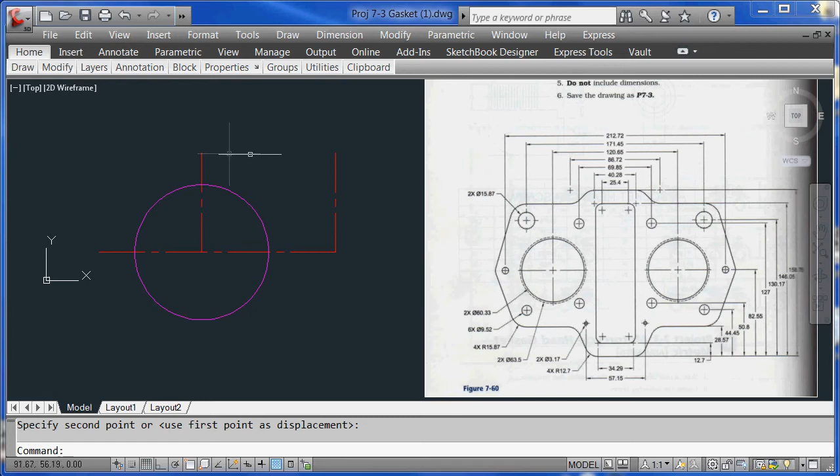Okay. So what I'm going to do initially is kind of start laying out some of these outer lines. I'm only going to do a few, so that way you get to see how I would do this, but also you guys could hopefully pick it up pretty quick and then just continue on your own. So what I did was I went ahead and brought in a scanned image and I popped it in right next to this starter piece that I gave you guys.

Okay. So if you remember correctly, I told you, and I misled you, that this was going to be symmetrical with the bottom. And after looking at it, it's not. Unfortunately, it's not. So we're going to have to construct this whole vertical entirely, but we can mirror it around the center of this. So in essence, the center right here is this little center line right there. Okay? That circle is obviously that circle right there.

But what we need to do is create from bottom to top this whole left-hand side. We could do the right-hand side, but I just started with the left-hand side, so I think I'll start there. So the first thing we need to do is start constructing from the bottom to the top, because that's the way our dimensioning is running. Okay, so note that the baseline is right here and we construct up.

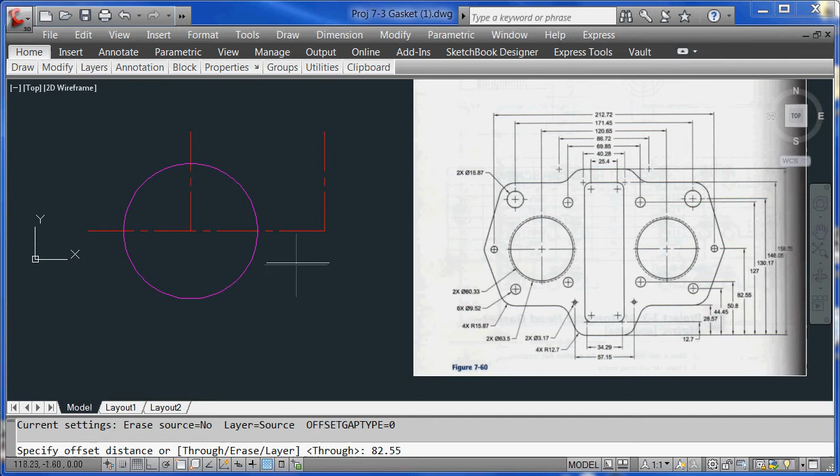So the first thing I want to do is identify what the baseline is. If you note, this dimension here is 82.55 millimeters. So what I want to do is offset that center line 82.55. So I'm going to type O for offset, 82.55, and select that line and place it down there. And notice it's off my screen, way down there. Okay, so it's down further than I thought.

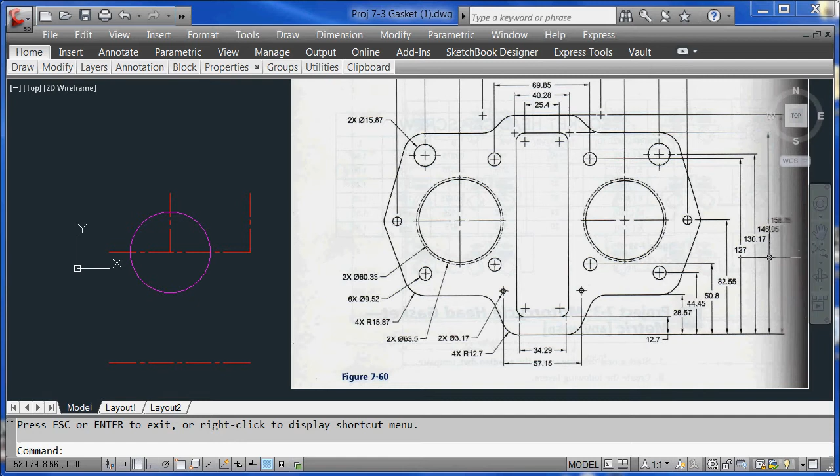So in order to see my sheet here, I'm going to just scale it up a little bit. There we go. Pan it over a little bit. Okay, so now I have my baseline, which is here. So what I want to do is maybe take the next step, which is this line right here. You know what? No, let me do the overall. And the overall, this kind of got smushed by my scan, so I'm looking at the book. It's 158.75 millimeters.

So I'm going to offset 158.75 and hit return. Select that and then place that one up there. Okay, so now I have this line and that line. And now I want this line right here, and that's 28.57. So I'm going to offset 28.57, go there to there. Okay, so now you kind of see what I'm doing here, okay? But I'm working on this side.

So now I need to figure out what's my dimension out here to the edge, because I want to get my max and mins. Before I do that, let me just place this line up in here, and that's 146.05 millimeters. So that's offset 146.05 millimeters, and let me place that there. Okay, so now I have the top, this one, and that one. Let me go ahead and change the layers. I'm going to stop the video here, and I'll come back and I'll have these on their correct layers.

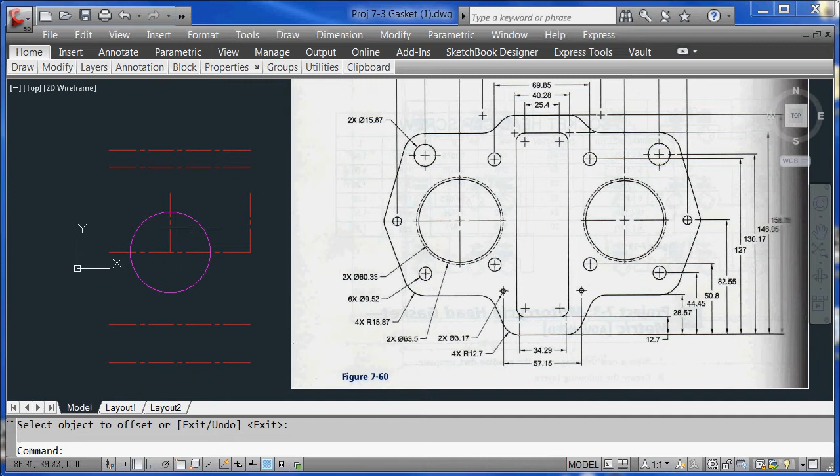Okay, I went ahead and changed these to the object layer, so we're going to go ahead and start. Now I'm looking at this drawing and I'm having a little problem with this right here. Nowhere on the drawing nor in the notes do they give you an indication what the diameter is of this hole, nor the distance from, say, there to there. So this is going to take a little guesswork. Let's make this diameter 7.00 millimeters, okay? Then from here to here, we'll make that 9 millimeters. So let me pan down here a little bit.

So if I want to go from the center here to this radial point, or this center point of this hole, the furthest most hole, I have to take the 212.72 and divide that by 2, which gives me 106.36. Okay, so now I have to offset that center line, 106.36, return, and then offset there. So that's where that center of the hole is going to be.

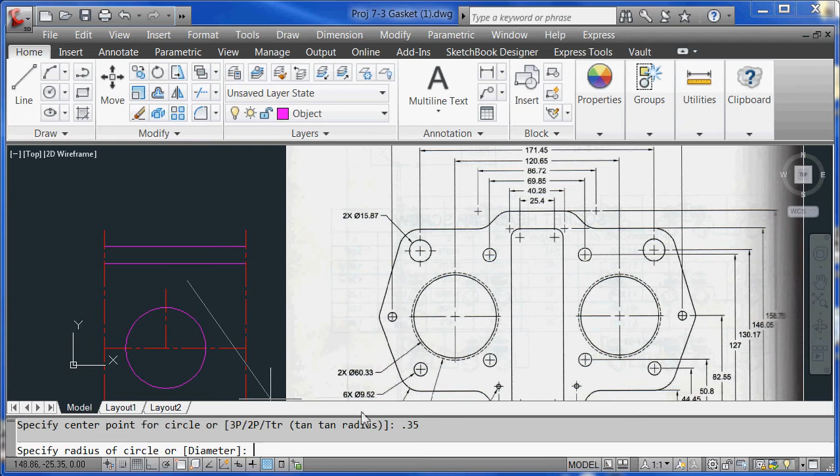Now, let me pan up and let me create that. And remember, I said that that circle, that hole there, was going to be 0.7 millimeters. So I'm going to type in C for circle, and I want the radius. So if it's 0.7 diameter, it's 0.35 radius, and I don't know why it's there. Let me do that again. I'm going to go to the end point of this thing, and it's going to be 0.35.

Okay, boy, that's kind of small. Actually, I made the mistake. Let me undo that. Undo. Center, and that's going to be 3.5. And again, I'm sorry about this. Center, and here, 3.5. Okay. That still looks a little small, but we're going to live with that. That's a 7.0 millimeter. Okay. Now, I said that we're going to use a distance of 9.0 millimeters from here over here. So I'm going to offset that 9 millimeters there. Okay, so now that is our furthest most point right here. Okay.

So now what we want to do is we want to figure out what some of these other dimensions are. So notice what we need to do is we come across here to there somewhere, and then from here to here. Now the way we get these two radial points right here, where these radiuses exist, is right here at these two center points. Okay, so let's look at this one real quick. That's 40.28 overall. That's going to be 20.14 off of the center line. So I want to go offset 20.14 to there.

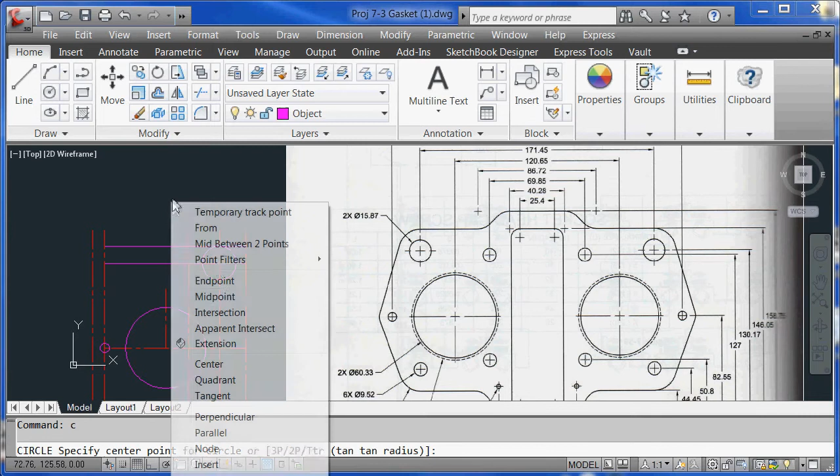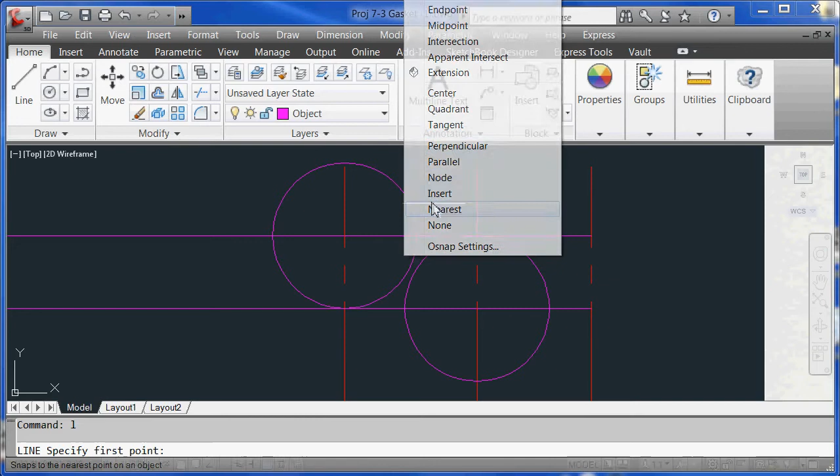So I'm going to hit C for circle, shift right click to the intersection there, and then I'm just going to go to the intersection, there it is, of that one. And notice my circles don't touch, which makes sense. Okay, they don't have to. So what I need to do is I need to introduce now a line tangent to both of those. Okay, so let me invoke the line command, and then hit the shift right click, go tangent to here, and then tangent to that one. And remember, AutoCAD figures it out.

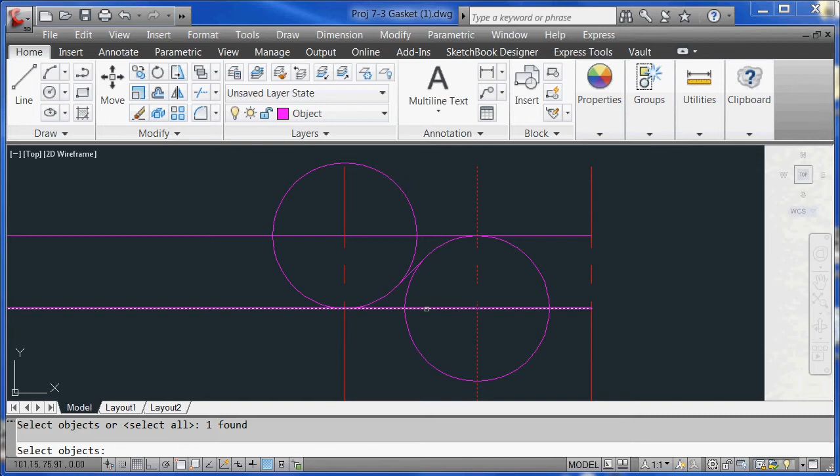So now I just need to clean up my work here. So I'm going to type TR for trim, and I want to trim, let me just clean this up, that one, and I want to trim off that one. TR for trim, select the thing I want to trim, say that I want that gone up to that point, so I want this one as well. Okay, so now you can see how it swoops down. Now I just need to trim off this one here.

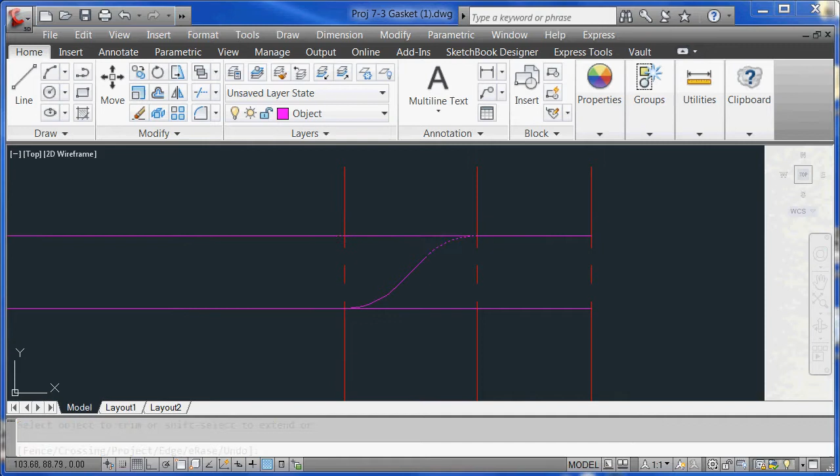Zoom dynamic, and go back out, and let me take a look at the drawing here. So you can see how it goes like that, and right down there like that. Okay, now let's zoom out a little bit more here.

So now I have this little piece that I need to trim. So, TR for trim: select the trimming line, the cutting line, then return, and then cut the thing I want to trim. Okay, there we go.

So now let's take a look at this. I want to teach you guys how to read these drawings. Notice this says 2 by diameter 15.87 millimeters. That means there's 2 holes that size, and that's that one and that one.

Let's take a look at another one here. This one right here says 6 by diameter 9.52. That means there's 6 holes that are this size: 1, 2, 3, 4, 5, 6.

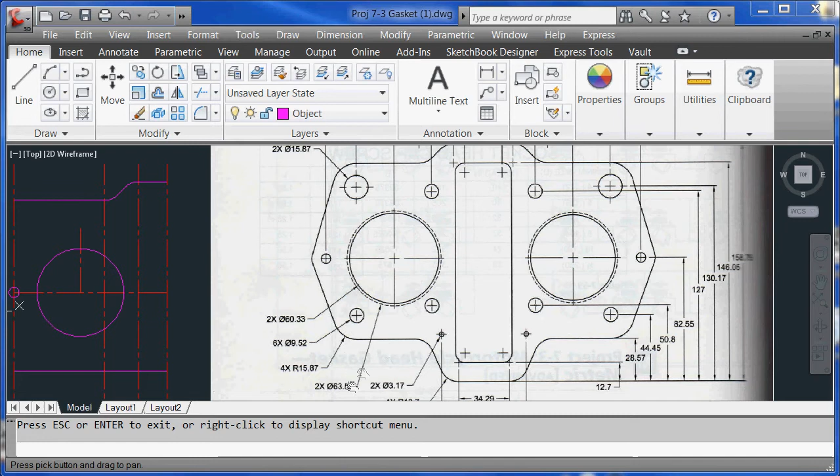Here this says 2 by 3.17 millimeters. That means there's 2 holes, 1, 2, there. So if you don't see one of these dimensions, that's because it's covered under one of these notes. Okay, so let's see what's our next step here.

I'm looking for this radius. Here it is, so it's 15.87. That's 15.87 because there's 4 times: 1, 2, 3, 4. Okay, but I still don't know what this angle is.

So what I need to do is construct out that radius right there. I'm sorry, this radius right here. Let me go ahead and do that. First things first, let me escape here.

I'm going to extend this line to that line right there. Okay, so I have to extend. It says select the objects, and what I need to select is the limits of the extent there. Hit return because I've selected all those that I wanted. Now I select the thing I want to extend. There you go, so now it's there.

So what I can do now is, once I create that radius, then I can go ahead and make it a tangent. But I don't know if I sent this out far enough.

Oh no, I haven't constructed this line right here yet, where the center is. So that line is 171.45. 171.45 divided by 2, and that's 85.725. So I'm going to offset the center 85.725, return, select that, and go here.

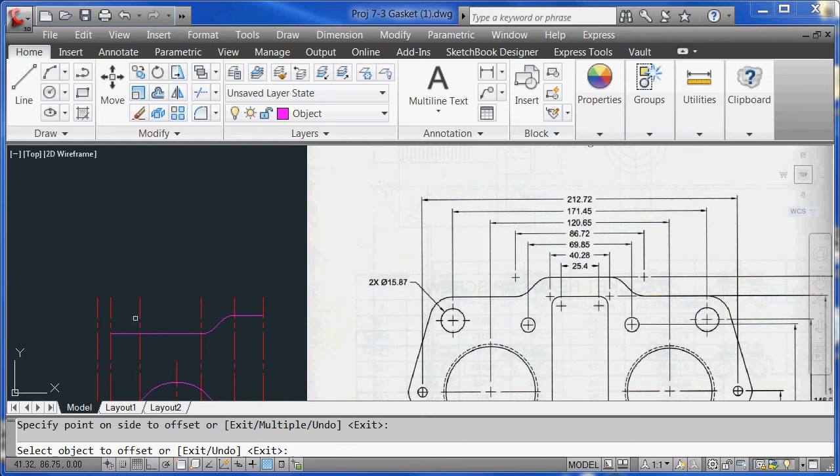So that's about right. Okay, and let's see, my radius is 15.87 millimeters. So here's a trick.

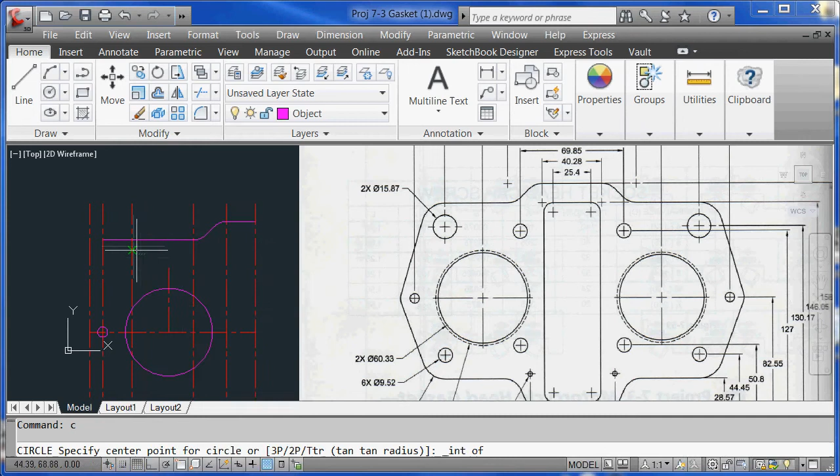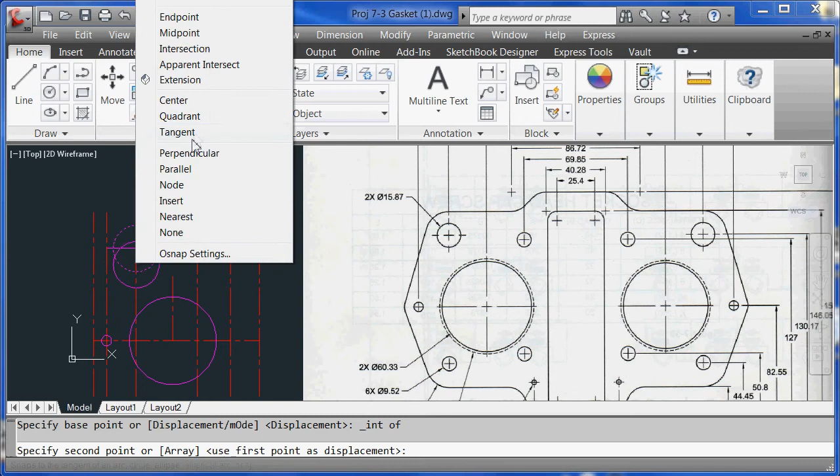All I need to do is type in C for circle, hit the intersection, and place my point right at the intersection, and I can type in - what was that one again - 15.87, 15.87, and that gives me an intersection where that hole belongs. So all I need to do is CO for copy, then hit shift, then intersection here, and then copy a piece, see, intersection again, right there.

Okay, so trim - I can trim that off. Oh, not trim, I wanted to erase the whole thing off. So note that right here, that line just runs right into my circle. So I can go ahead and trim that off right there.

So now I can create a line at the intersection. Oh, I typed apparent intersection, but that's okay. Here, and then I'm going to say tangent to that one. And then all I need to do is trim, TR, select my 2 trimming planes or lines, hit return, and then hit my thing that I want to trim.

So now you can see how I'm moving my way around. Okay, so which lines don't I need anymore? I don't need this one anymore. Well, you know, I might. No, I don't - you know what, I'm going to keep that off because I'm going to show you a different way to do it. This one's done, and I'm going to keep this one just in case. This one I'm going to keep just in case, and I think this one I can get rid of, and that one. Okay, so note I have a 15.87 radius in here.

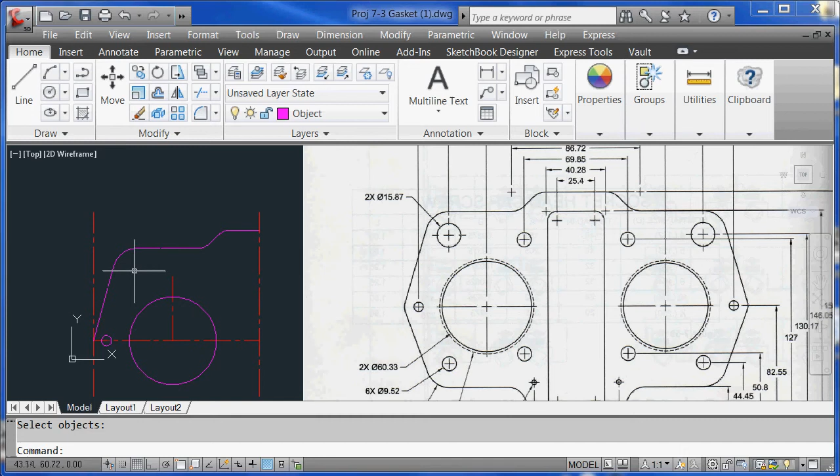15.87, divided by 2, that's 7.935 millimeters. I need to put a circle or a hole right here of 7.935 millimeters. So the way I do that is I type C for circle, and then now I want to shift right-click, and I want to go to the center, the center of that arc.

Okay, and then all I have to do is type in the radius of, actually I can just type D here and type the diameter of 15.87. Return, and there's my hole.

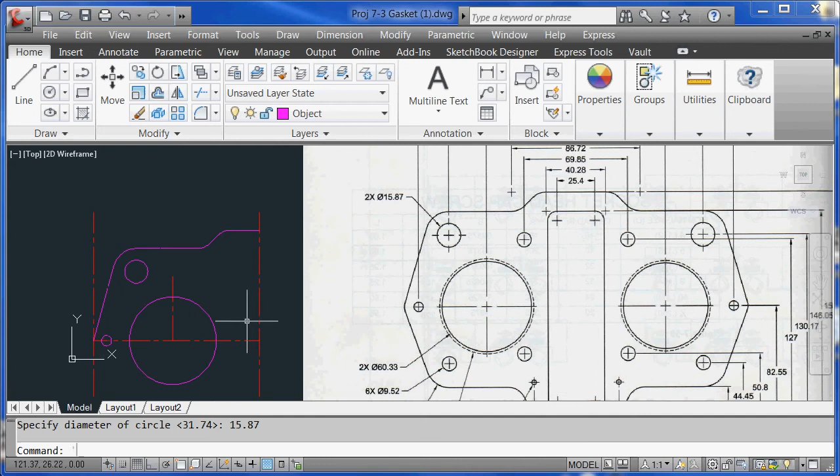I think you get what I'm doing here, okay? And you see, I kind of walk my way around this way, and now I'm going to walk my way back down in here in this area. But I think you're getting the hint of how I'm laying these lines out.

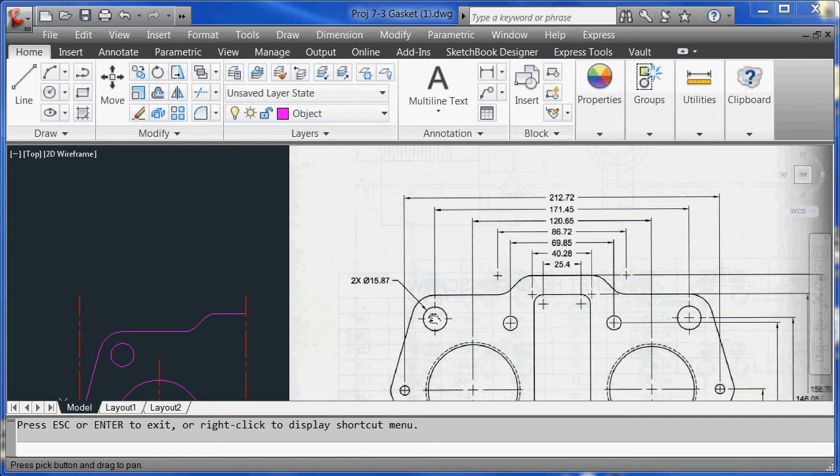I just noticed something. I noticed that this hole here is probably in line with that line right there. So what I'm going to have to do is create another construction line. Now, since I already went through the trouble of figuring out what half of this distance is to there, I established that hole, this one.

So all I need to do is go and establish a line down the center of that hole. So I just type L for line, shift right click, center, go here, and hit F8. F8 gives me an orthogonal, just go straight up and down, and place a point there somewhere. And I type the command MA for match properties, type the center, hit the center, and then hit this one right there. Notice it changed the layer and the line type.

So now I have a center line there. Now what I need to do is establish this hole in the vertical position, and that is 44.45 millimeters up off the baseline. So that is going to be offset 44.45 millimeters. Go there, and that's where it's at.

So now that circle, hole I should say in this case, is 9.52. So I invoke the circle command, I hit the shift intersection, go here, almost lost where I was, and then hit D for diameter, and then I use 9.52. Okay, so there's my next circle.

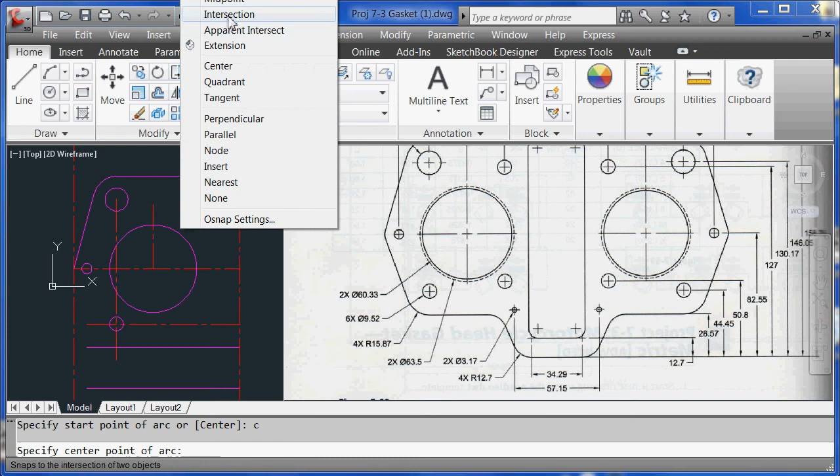That's not what I wanted. Let me do this again. ARC, and then I want the center. Center of the arc is the intersection of that. And then the start point is going to be at the intersection here. And then I got to, it always swings up the wrong way.

Okay, let me take F8 out, see if that helps me. No, it doesn't. Okay, so let's do my favorite trick. Erase that. How about just a circle? Intersection. Now you know why I like using the circles. And then shift intersection again, just to there. Okay, so type the line command, hit the end point of that, and then the shift right click, tangent there, and I'm good to go.

Now let me just clean up my lines here, use those two, all these three as my cutting lines, return, and now I can just trim those off. Okay?

Okay, so what I'm going to do is leave you to your own devices. I'm going to go ahead and let you finish this up, but you saw how I was locating different objects, and unfortunately I'm sorry that the author didn't include these distances here for you, or the overall from the center to this distance, or the overall. But I think I've given you enough information that you can construct the rest of this.